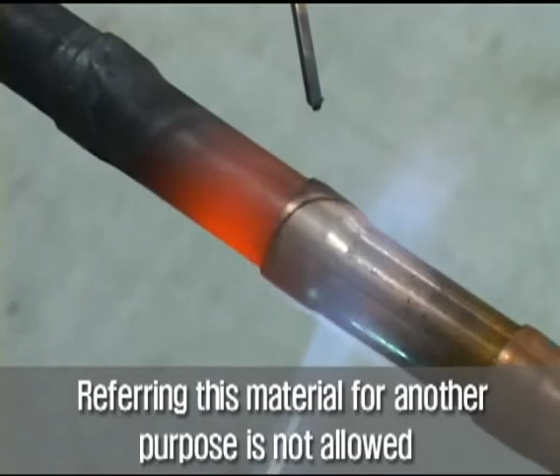Brazing process and contents are as follows. Brazing preparation, working environment and dressing, nitrogen gas release, welder setting, gas pressure adjustment, gas leakage test,

flame size control, heating and solder approach, emergency action, inspection and welding defects, closing of welding, safety instructions.

Tools and gauges should match local regulations and standards. Gas cylinder of propane, oxygen, and nitrogen. Reversed fire protector, pressure regulator and gauge and hoses for each gas.

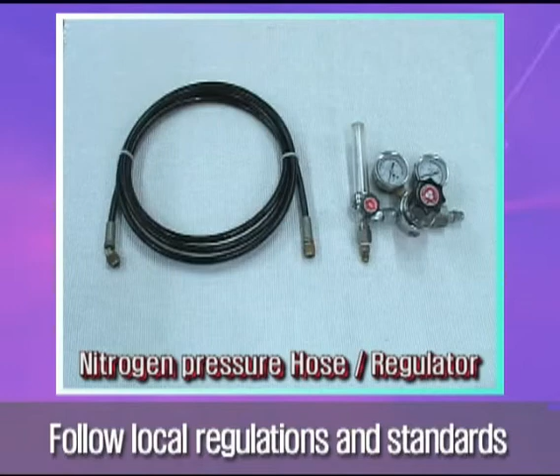Welding torch, mirror, igniter, tip cleaner, spanner, nipper, long nose, screwdriver, fire extinguisher, firefighting water, fireproof mat,

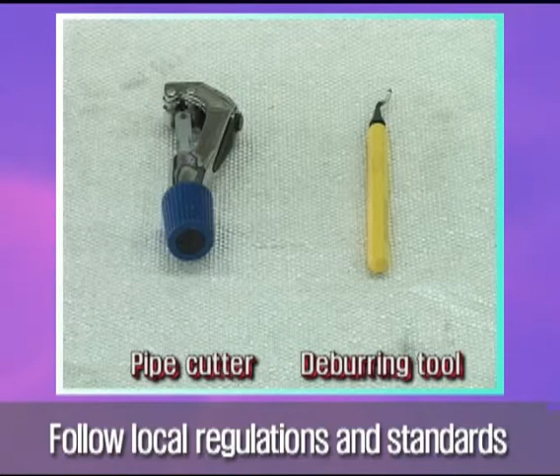gloves, additional sleeves, protective goggles, welding apron, safety shoes, helmet, soap bubble, brush, pipe cutter, deburring tool, and pipe expander.

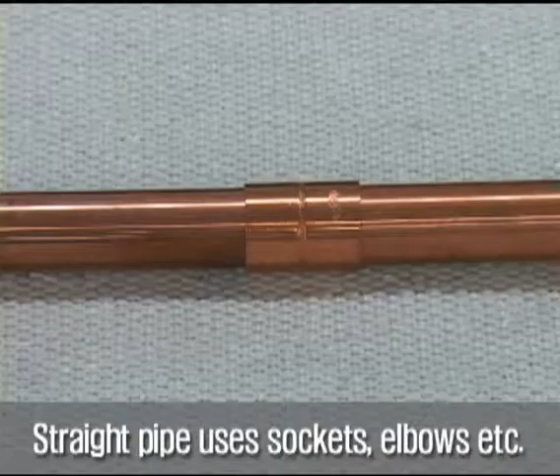Prepare pipes and connectors of proper thickness with no foreign materials inside. For welding straight pipe, use sockets, elbows. Soft pipes of below 19.05 millimeters can use sockets and elbows or expanded pipes. For expansion, use exclusive tools and follow these.

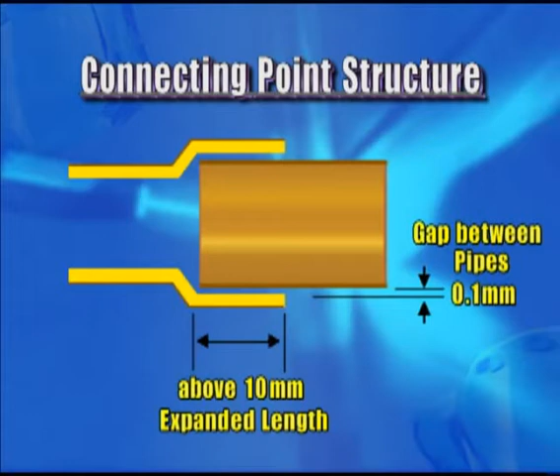Expanded length of the pipe should be more than 10 millimeters, and the gap between pipes for insertion is 0.1 millimeters. After pipe cutting, remove burrs for good insertion and welding.

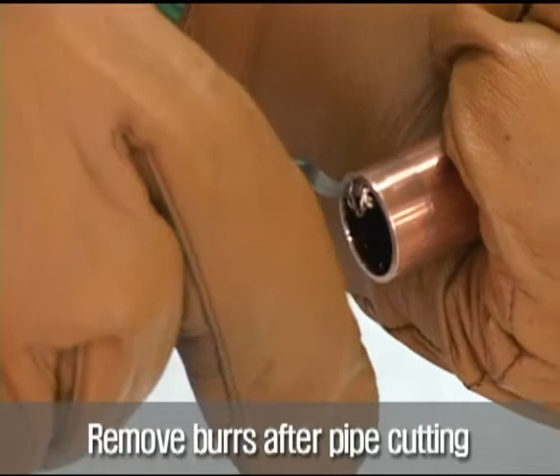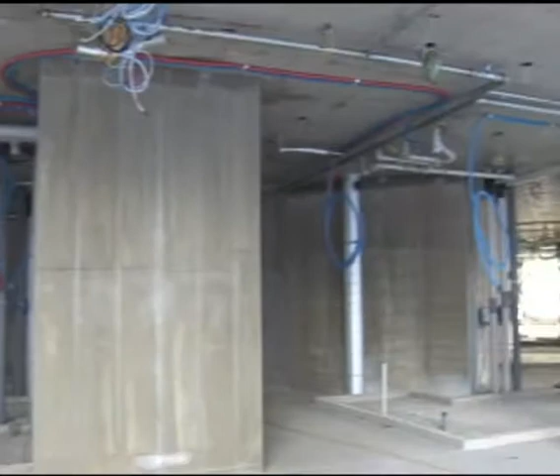As the brazing can be dangerous, check the nearby area and safety instruments, preparation, etc. before work. Overheated pipe or flame can make fire and explosions. Remove all these materials in the working spot. Separate and cover the inflammables like oil, wood, paint, cloth, interior wiring, etc., and explosive materials. Prepare fire extinguishers and firefighting water nearby.

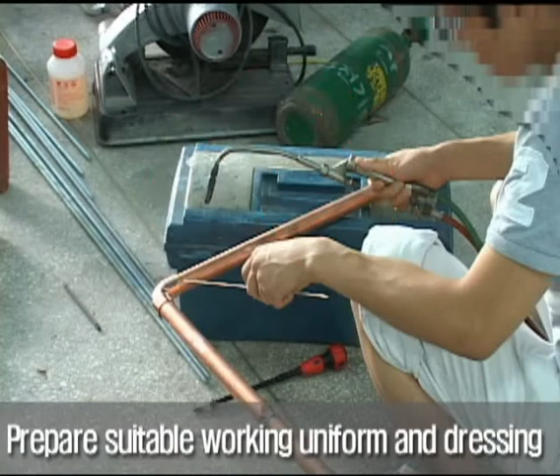Prepare suitable working uniforms and wearings like helmet, protective goggles, welding apron, additional sleeves, gloves, safety shoes, etc. Be sure these wearings do not disturb welding work. Suitable uniforms and wearings ensure safe welding work.

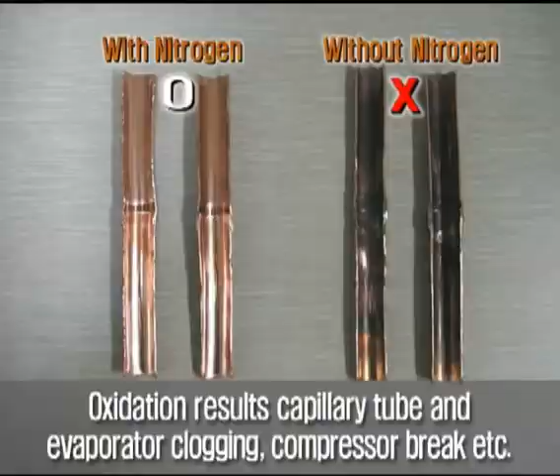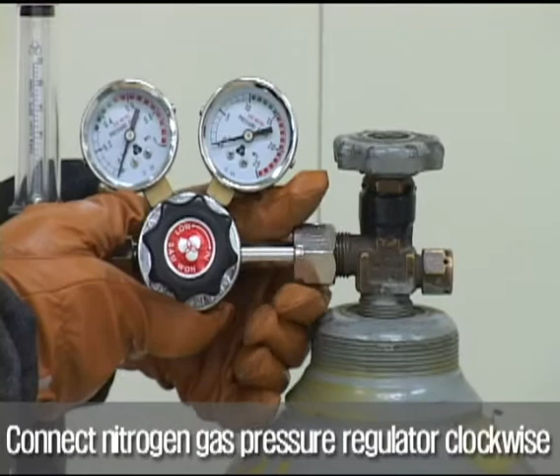Always release nitrogen gas into the pipe during the brazing to prevent oxidizing. It will result in capillary tube and evaporator clogging, compressor break, etc. Connections can be like these. Align the nitrogen pressure regulator to the connector of cylinder correctly and fix it clockwise and finish with a spanner.

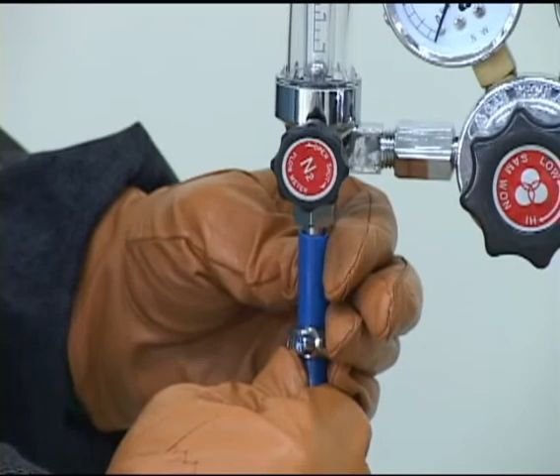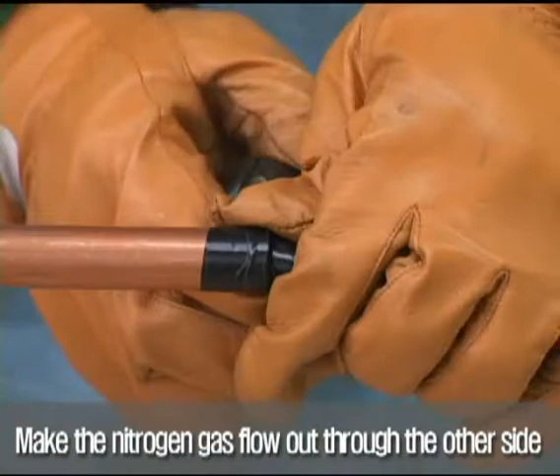Align the gas hose to the nut of the ball gauge correctly and fix it with a hose band. Connect the other side to the pipe for welding and tape it not to leak gas. Make the gas flow out through the other side of that pipe.

Assemble the welder in the following process. Install the cylinders of oxygen and propane gas on an exclusive carrier and fix it with chains tightly, not to fall down. Align the oxygen pressure regulator to the connector of oxygen cylinder correctly and fix it clockwise and finish with a spanner.

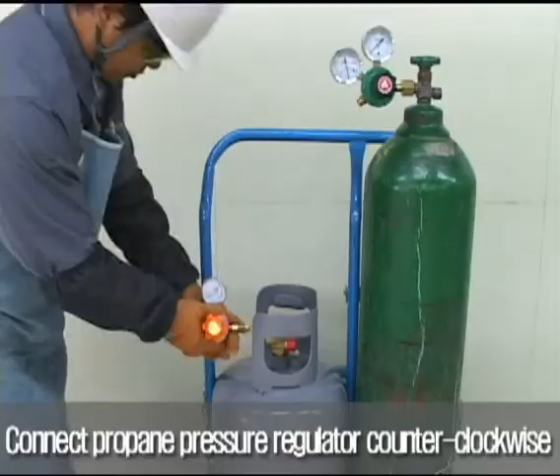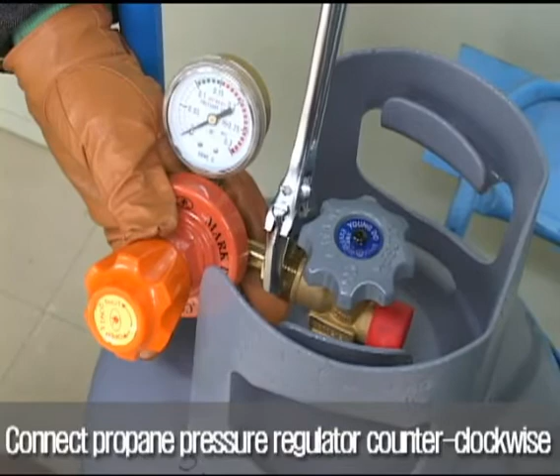Align the propane pressure regulator to the connector of propane cylinder correctly and fix and finish it counterclockwise. Align the reversed fire protector to the propane pressure regulator correctly and fix and finish it counterclockwise. Be sure to install the reversed fire protector as it protects the reversed gas flow or reversed fire.

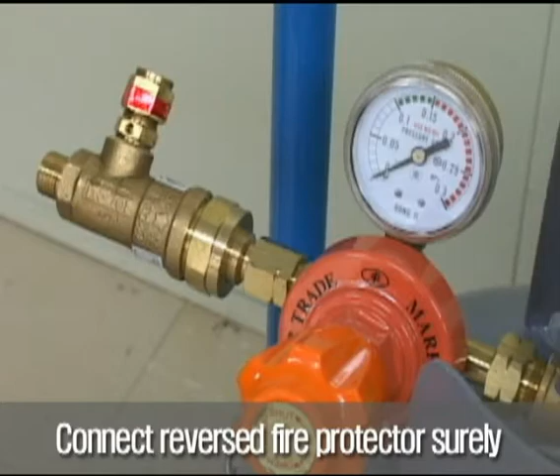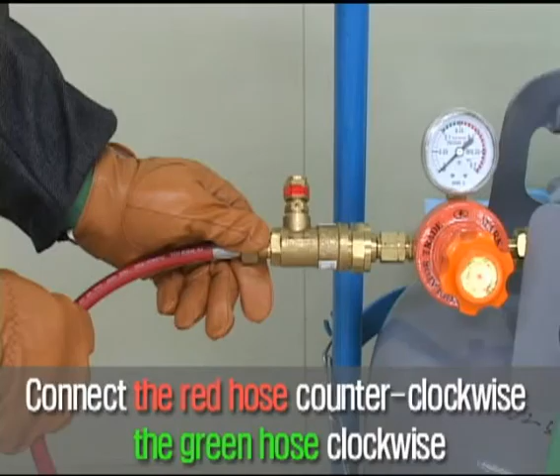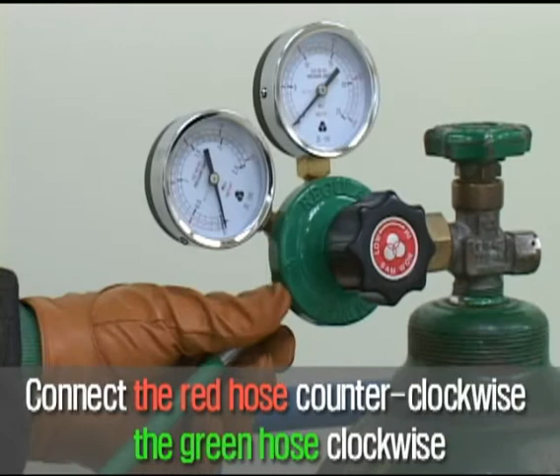Connect red hose to the propane cylinder and green hose to the oxygen cylinder. Align the red hose to the reversed fire protector correctly and fix and finish it counterclockwise. Align the green hose to the oxygen pressure regulator correctly and fix and finish it clockwise.

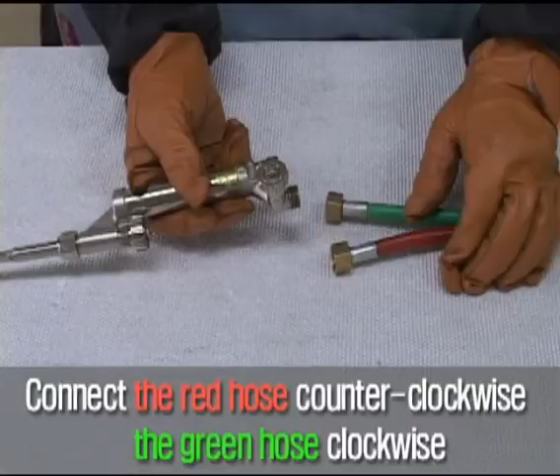Again, connect both hoses to the welding torch. Align the red hose to the lower connector of the torch correctly and fix and finish it counterclockwise. Again, align the green hose to the upper connector of the torch correctly and fix and finish it clockwise.

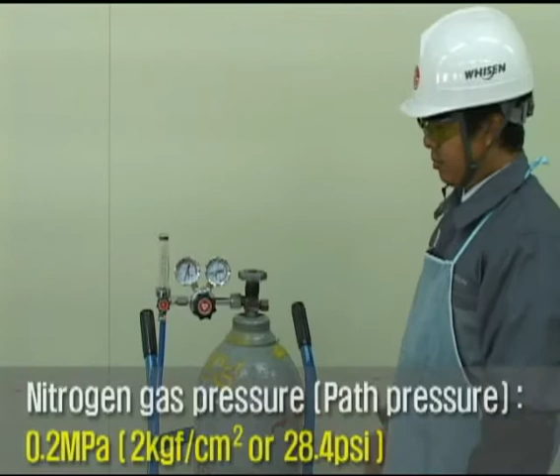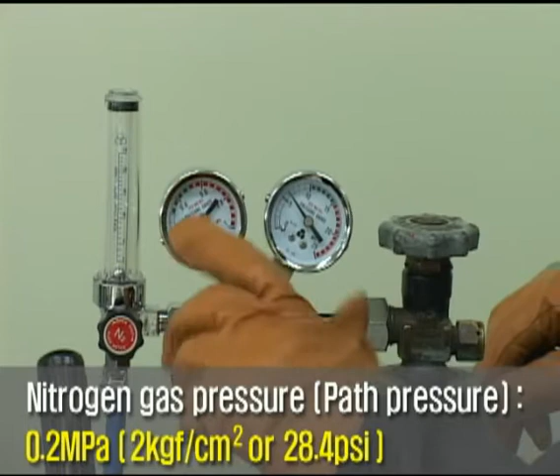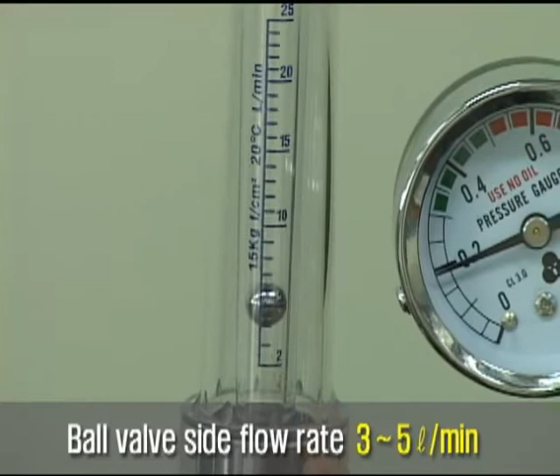Adjust the gas pressures like these. Open the nitrogen cylinder valve slowly clockwise and adjust to 2 kilograms of force per square centimeter or 0.2 megapascals. And open the flow valve slowly and adjust the gas amount to 3 to 5 liters per minute to flow into the pipe. This low pressure will move a flame slightly only.

Open the oxygen cylinder valve and open oxygen valve of the torch about 90 degrees and open the regulator valve clockwise slowly and adjust the pressure to 0.4 to 0.5 megapascals or 4 to 5 kilograms of force per square centimeter, and close the torch valve.

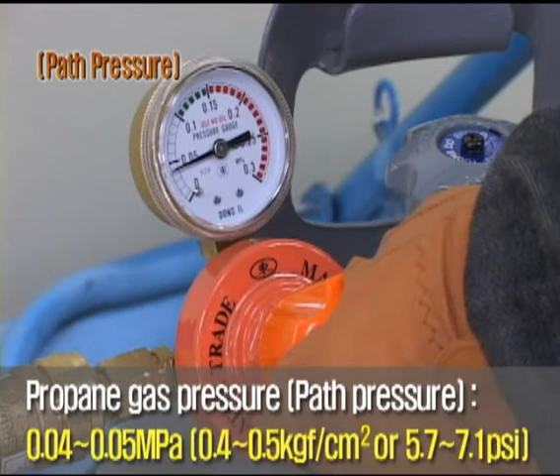Open the propane cylinder valve and open propane valve of the torch about 90 degrees. And open the regulator valve clockwise slowly and adjust the pressure to 0.04 to 0.05 megapascals or 0.4 to 0.5 kilograms of force per square centimeter, and close the torch valve.

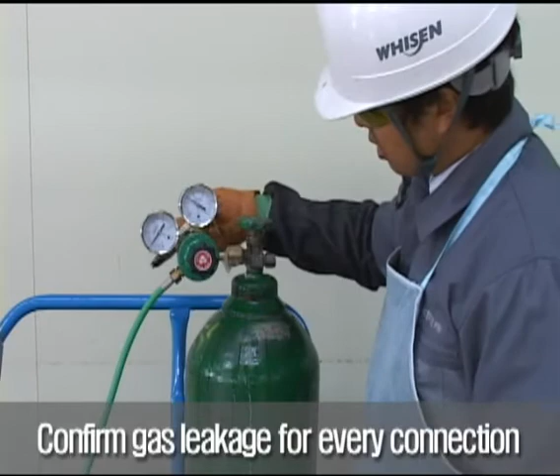After assembling the welder, confirm the gas leakage for every connection, pressure gauge and valve with soap bubbles and water, etc. As the gas is very dangerous, leakage test is an important process.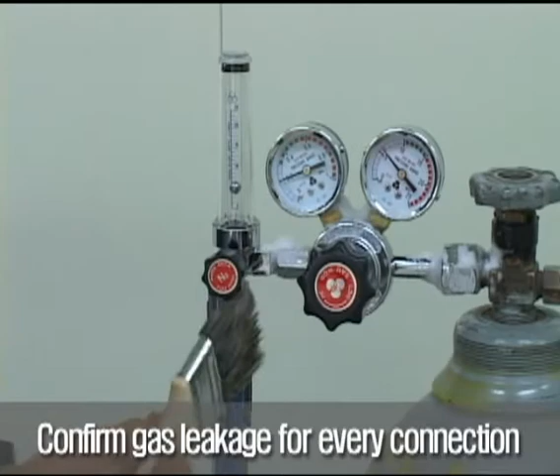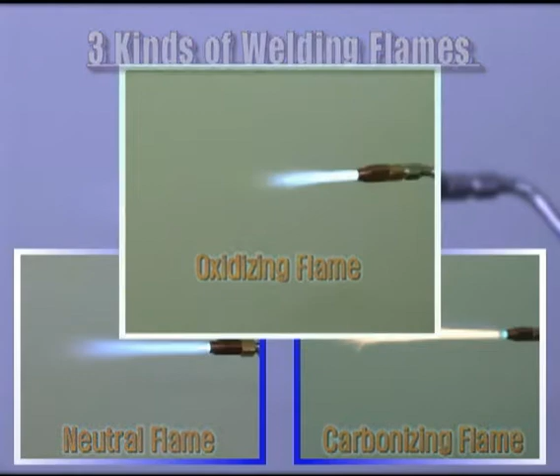In welding, there are three kinds of welding flames: oxidizing, carbonizing, and neutral flames. When the oxygen amount is more than needed, it becomes an oxidizing flame, and less makes a carbonizing flame. The neutral flame is suitable for welding, and its composition is 4.5 oxygen to 1.0 propane gas.

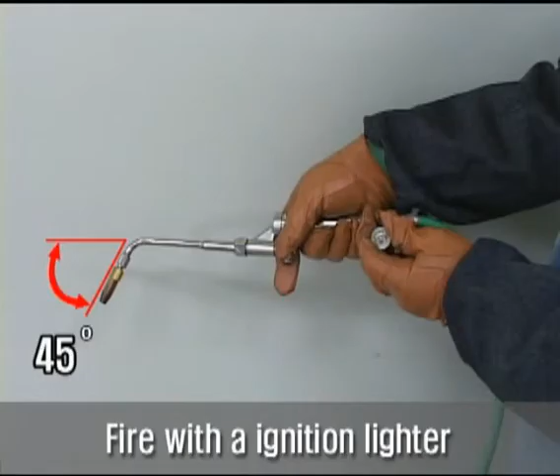To make a neutral flame, open the propane valve about 30 degrees counterclockwise. Face the torch about 45 degrees downward and light a fire with an igniter. Open the oxygen valve slowly counterclockwise and adjust the flame, holding it so it does not fly out from the tip.

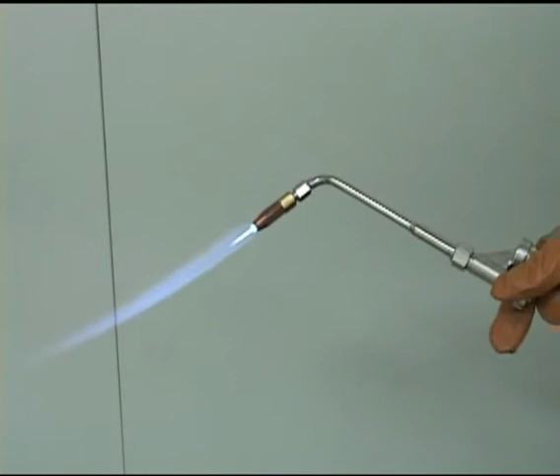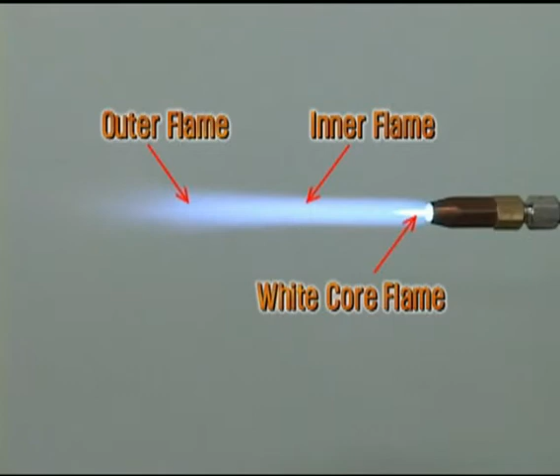The flame color changes to blue with three ranges of outer, inner, and white core flames. Make the white core flame size 15 to 30 millimeters, and then it becomes the neutral flame, good for brazing.

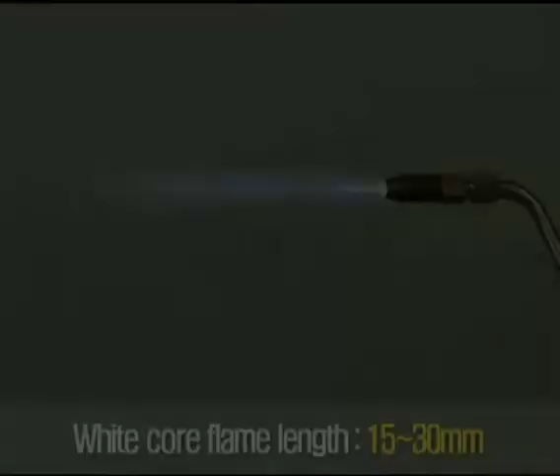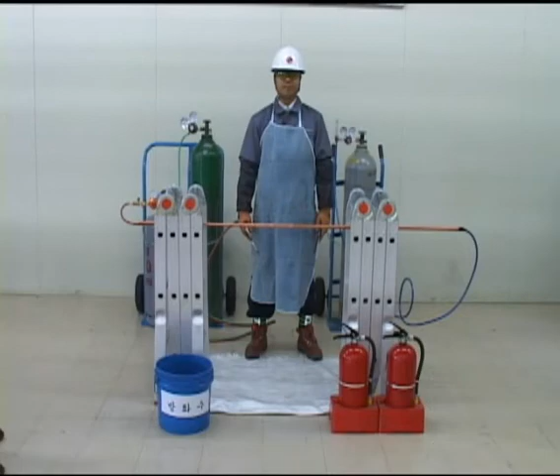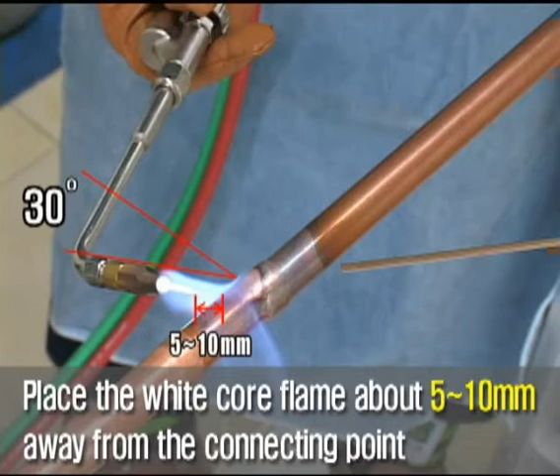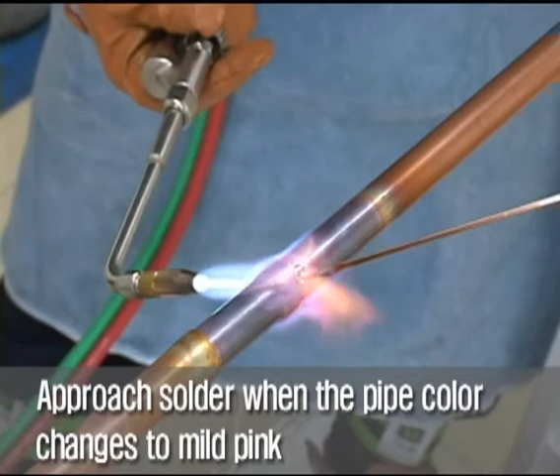In welding, we can make it horizontally and vertically. The horizontal welding process is like this. Place the white flame about 5 to 10 millimeters away from the connecting point. Make the flame direction about 30 degrees downward, and heat the welding point evenly, moving from inner pipe to outer pipe and to the connecting point. The pipe color will change from orange to mild pink, which means about 600 to 800 degrees Celsius.

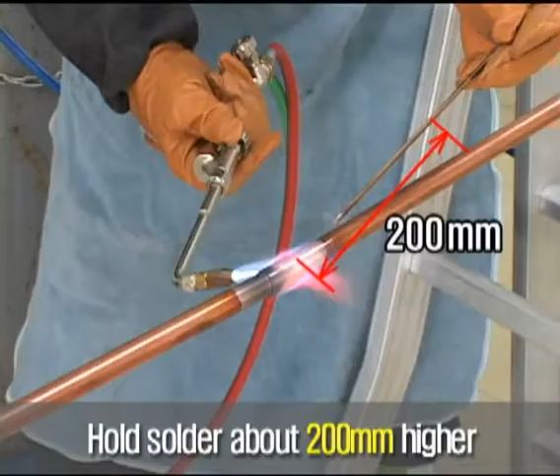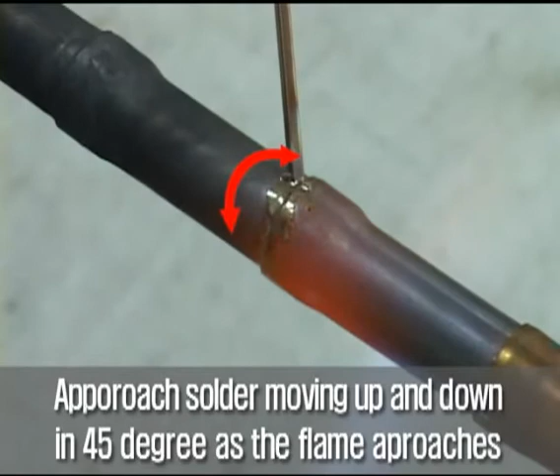Approach the white cone flame to the welding point at an 85 to 90 degree slant, and approach a solder to that point at a 45 degree slant from the opposite side, holding it about 200 millimeters high. At this time, moving the solder up and down will help good welding. Draw the flame out, passing over the inserted pipe part. After 2 to 3 seconds of the flame removal, remove the solder.

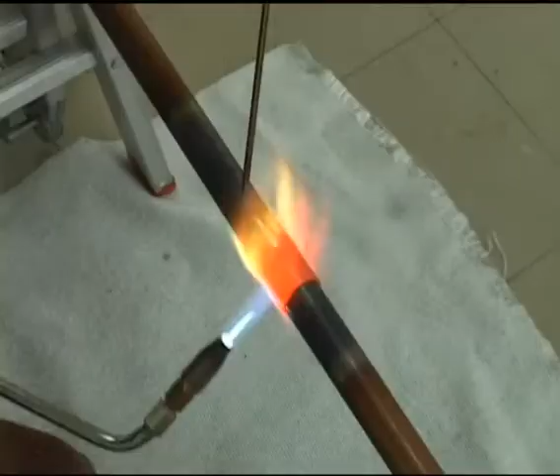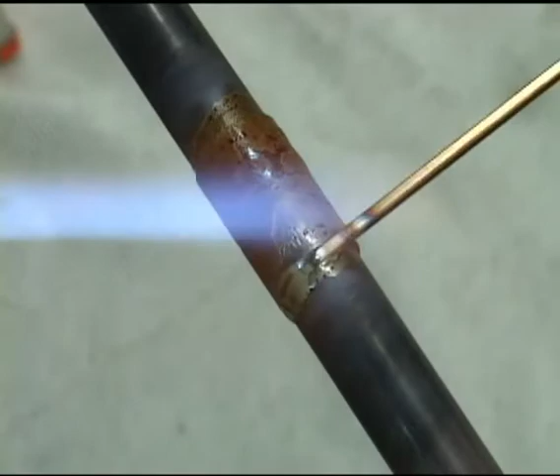For bigger pipes, brazing can be made by approaching solder to the connecting point and moving flame and solder down together. And draw the flame toward the inserted part to guide melted solder and finish welding. After welding, close the nitrogen-releasing valve only when the pipe heat is cooled down sufficiently.

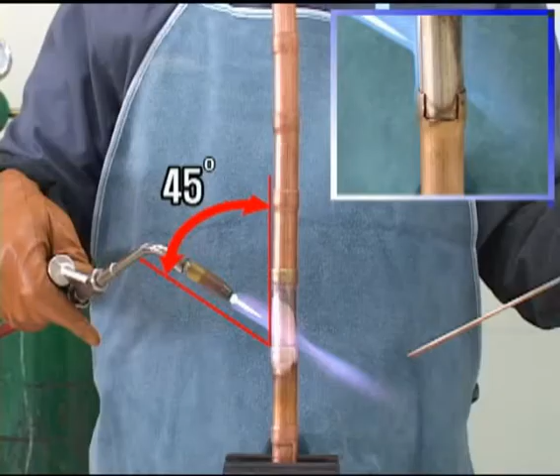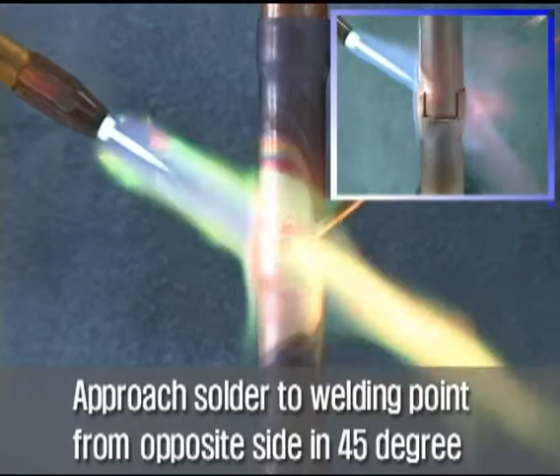Vertical welding is for vertically connected pipes, and the process is a little different from the horizontal one. Approach the white cone flame to the welding point at a 45-degree slant, and approach a solder to that point at a 45-degree slant from the opposite side, holding it close, about 200 millimeters. Draw the flame out, passing over the inserted pipe part. After 2 to 3 seconds of the flame removal, remove the solder too.

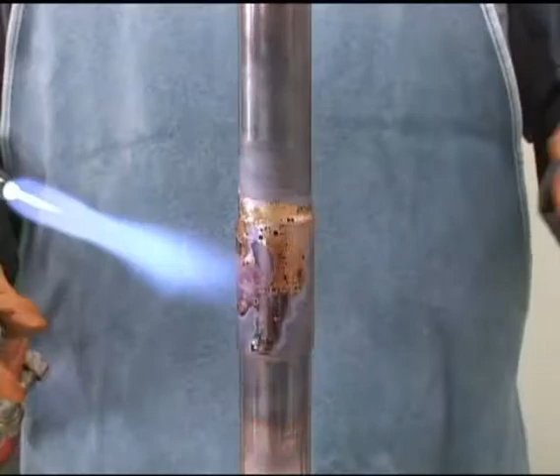For bigger pipes, brazing can be made by approaching solder to the connecting point and moving flame and solder down together. And draw the flame toward the inserted part to guide melted solder and finish welding. After welding, close the nitrogen-releasing valve only when the pipe heat is cooled down sufficiently.

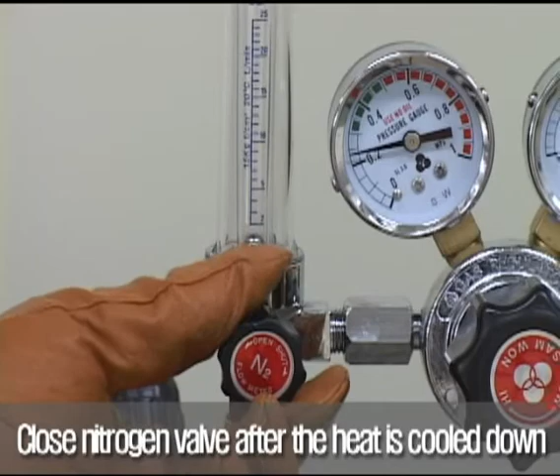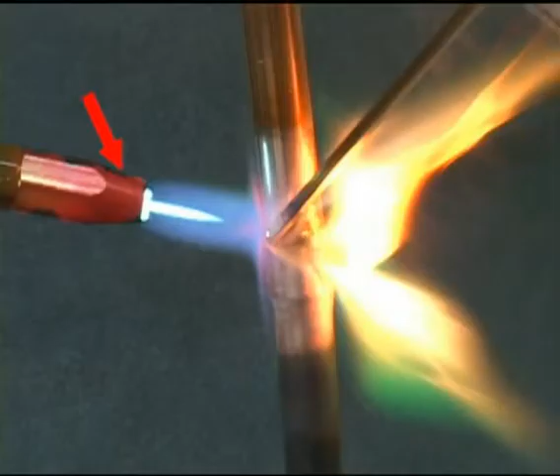When trouble occurs from a welding tip problem during welding, follow these guidelines. If the tip is overheated, immediately close the propane valve of the torch first and the oxygen valve next to prevent counter fire flow, and open the oxygen valve about 90 degrees. Dip the torch into the water to cool down.

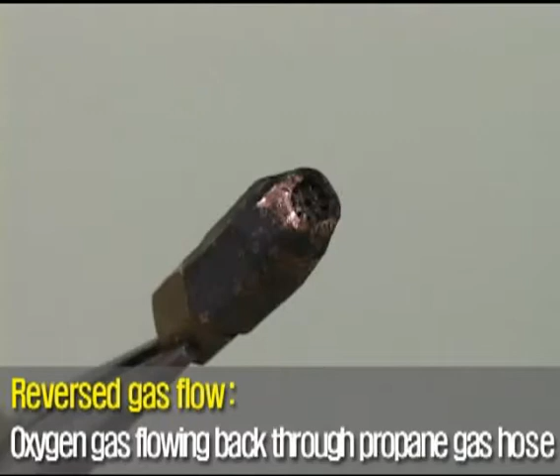If the tip is deformed or clogged by touching the welding pipe or foreign material, immediately close the oxygen valve of the torch first and the propane valve next to prevent counter gas flow. In this case, be sure to change the welding tip.

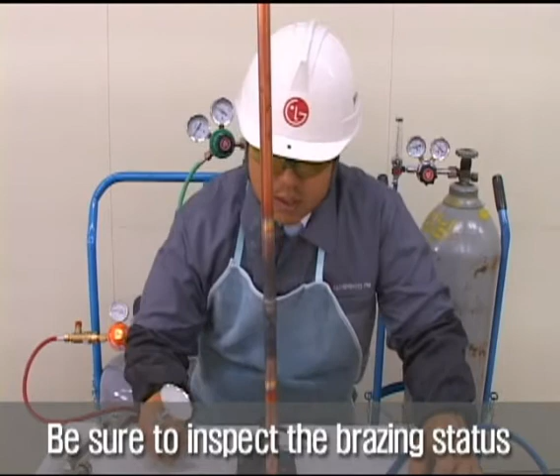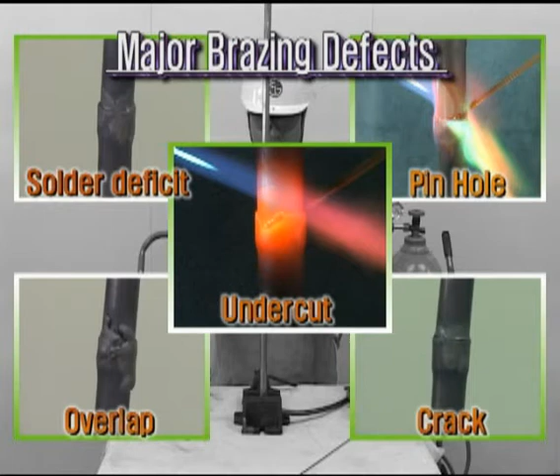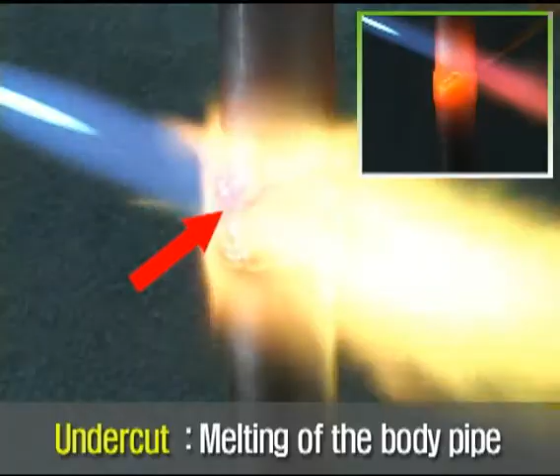Inspect the brazing status carefully. Check if it has any defect, if both connected pipes are aligned, etc. If needed, you can use a mirror. In gas brazing, the major defects are like these. Undercut is the pipe deformation by long heating before the solder is applied. Solder deficit is the case where the solder is not filled fully. Pinhole occurs from foreign materials on the welding surface.

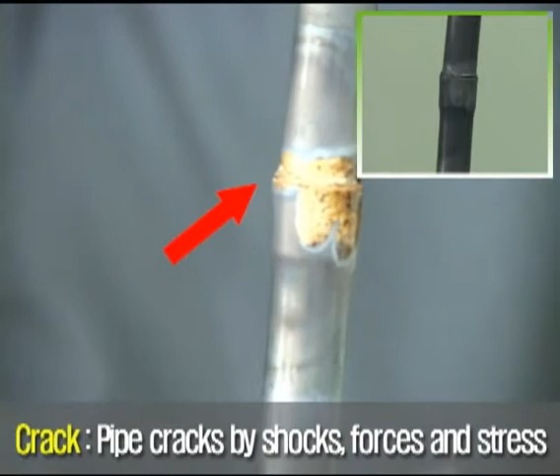When the heat is not enough and solder is applied, it makes overlap on the pipe surface. Additional shocks and forces just after the welding or during the welding will make these cracks. Be careful not to make these defects, which frequently happen during brazing.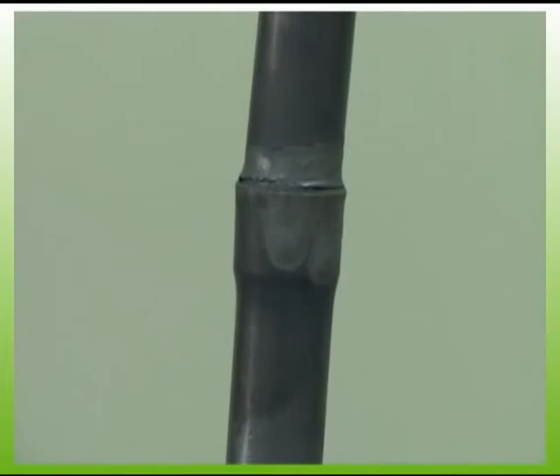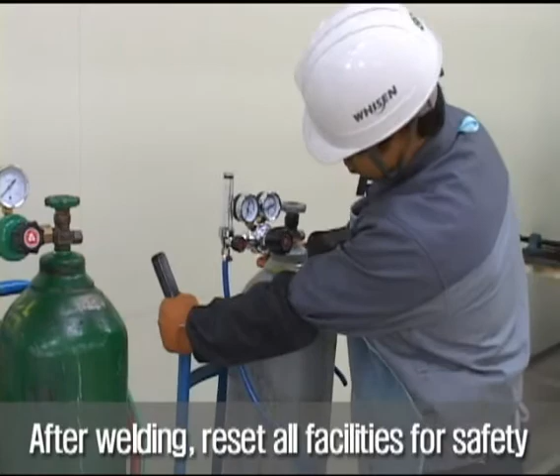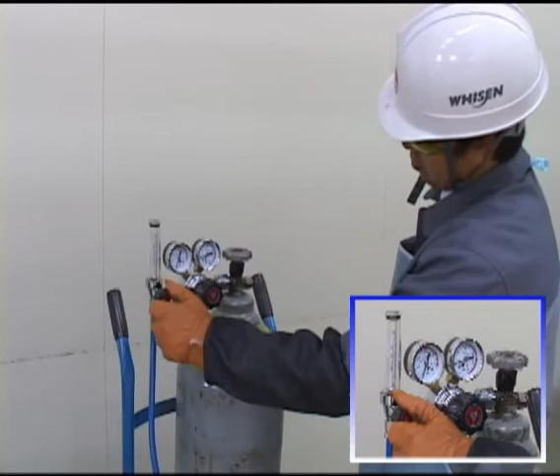After finishing all jobs, reset the welder for worker safety and the tool's life. First, close the valve of the nitrogen cylinder and release the remaining gas in the hose and adjusting valve by opening the ball valve of the air mount adjusting. Confirm the gauge handle shows 0 and close the adjusting valves counterclockwise.

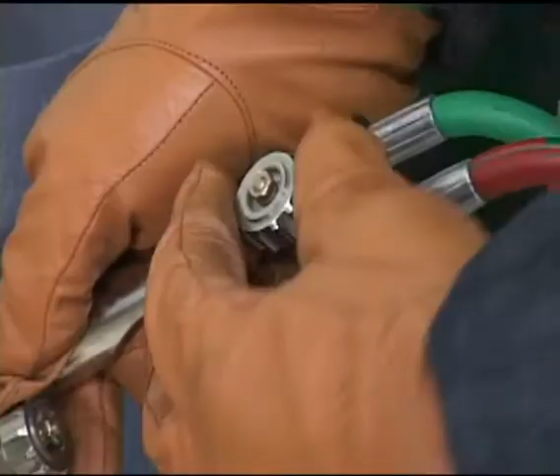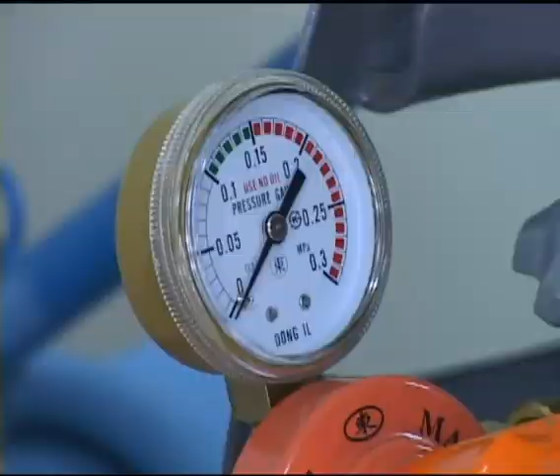Second, close the valves of the propane and oxygen cylinders and release the remaining gas in the hose and adjusting valve by opening the two valves of the torch. Confirm the gauge handle shows 0 and close the adjusting valves counterclockwise. And clean all tools, materials, and environment and reset them.

For safety, follow these things carefully in welding. Don't forget to install a reversed fire protector to prevent reversed fire or gas flow. Gas cylinders should have the inspection pass mark within the effective date and have no rust on them. Always place the torch on the working table and do not let it touch oil or grease. Gas cylinders cannot be thrown or dropped.

Keep the gas cylinders in good air circulation and avoid direct sunlight. Always keep fire extinguishers and fireproof water nearby. Open the propane valve first to ignite and the oxygen valve next. Do not use matches or small lighters for ignition. For moving, use the exclusive handling vehicle.